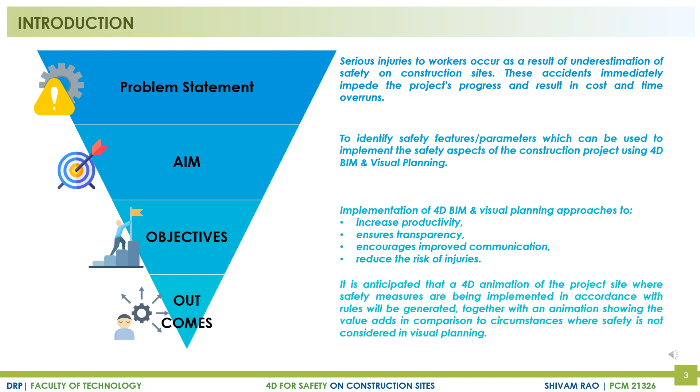The outcome here is targeted to be a 4D animation of the project site where all these safety measures are implemented, and a value-add comparison between the traditional construction project and the advanced construction project using 4D and visual planning principles can be compared. The next part will explain the literature review process.

Prior to the commencement of the research, the literature review has been done, and the introduction part says that BIM and health safety has been advancing with the development of newer construction practices, and 4D modeling has been playing a good role in the safety and health precautions in the pre-construction and design stage.

While there are still a lot of illnesses and injuries prone to construction workers and on construction sites, which are likely summarized by OSHA's categories like fall from heights, trench collapse, scaffold collapse, and repetitive motion injuries.

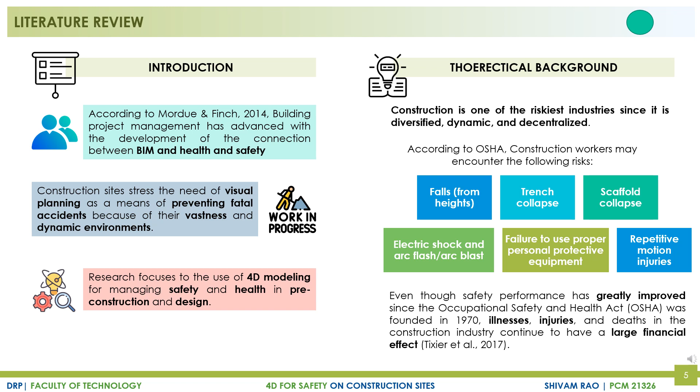Further, the literature review will focus upon the implementation of BIM towards the safety aspects. The research gap from the reviewed and studied literature is presented here.

There are a lot of BIM applications surrounding construction safety found, but there are hardly any instances that incorporate prevention measures modeling in the design process.

While there is certainly no parametric Revit family development in BIM kind of study found out, for instance a brief definition of parametric family is given.

On the right hand side we can see the literature review methodology that was figured out for this research paper, including the initial search, abstract filtration and final text, with results discussed in later slides.

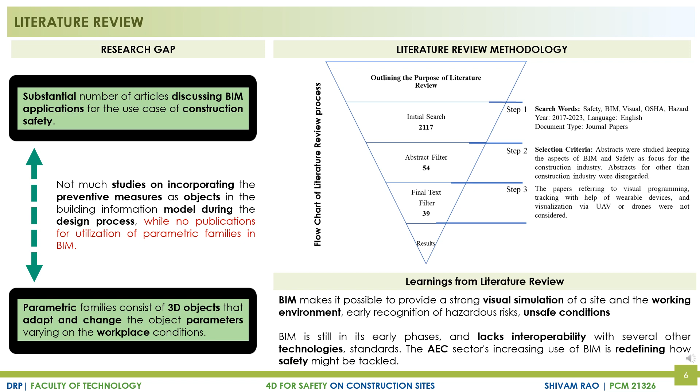This section will tell about the data collection processes. The primary data collection method is explained in this slide. Semi-structured interviews with subject matter experts were conducted.

Their opinions and reviews are given in the next slide, and their profile is given here. We can see the experts are of the HSE field, while another primary data collection was done with the help of conducting a questionnaire survey.

That is explained in detail in the report that is attached with this presentation.

The company profile has been attached of the construction firms to understand the scale of their company, while the semi-structured interviews have revealed that safety depends on project sites and is very varying according to the project and the conditions around the local sites.

Reference materials are widely available for Indian contexts, like guidelines, IS codes, and the Building and Other Construction Workers Act.

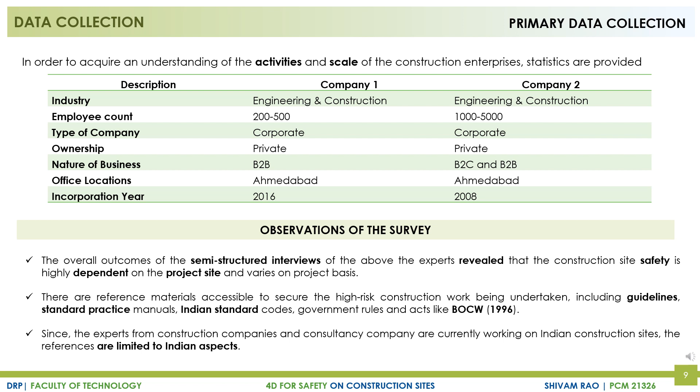While these construction sites are limited to Indian aspects, other national and worldwide aspects are covered in the secondary data collection. A lot of rules, regulations and guidelines are available throughout the world for the safety and health of construction workers and safer construction practices.

For the UK, the Health and Safety at Work Act is one of them. In India, the national building codes have their own guidelines. Similarly, here the list of other worldwide guidelines is present.

OSHA guidelines, the HSE guidelines in UK, the ILO guidelines and the ISO guidelines. These are all the sources of secondary data that will be referred to in the next slides.

The list of the standards reviewed by the author is given here. These standards are reviewed for the making of safety parameters in the 3D objects, which will be shown in the next slides. It includes the OSHA parameters.

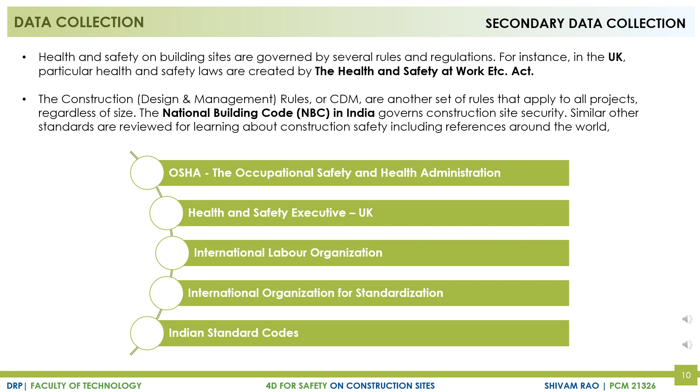There are certain books from Springer, Routledge, and several IS codes that have been referred to for the development of safety parametric Revit families.

Now we will go through the research methodology that is conducted and executed for the study of this work. This is the complete research methodology that has been followed for the study. This is a comprehensive flowchart that shows the tasks, the input, the process for that task, and the output that is derived at the end of the task.

Let's take the example of literature review. Here we have reviewed journal papers and have a definite search strategy, and we got the output of research gap, and we have developed a question based for the primary survey. Now second is the OSHA standards that we have reviewed, and similarly we can have the information regarding the safety clearances and what all objects are to be incorporated for equipments and the other objects on the sites.

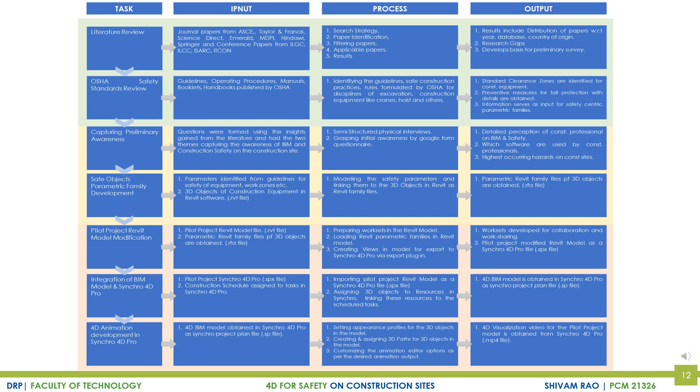This research methodology has several tasks like capturing preliminary awareness through a survey, then developing parametric family modeling, then assigning and loading this model families into the pilot project, then integrating this pilot project for the 4D visualization of the project in BIM model integration with Synchro, and then lastly we have the animation output development from Synchro 4D Pro.

The data analysis chapter will be discussed. Here we will be discussing the Revit parametric modeling, which will be the development of equipment families with parameters, and we will be looking through these families in this section.

Data analysis section. The findings from the study of safety standards is used to model the construction equipment and the safer zones around it. The barricades, the fall protection system, and the safe working zones are modeled, which will be shown in the next slides.

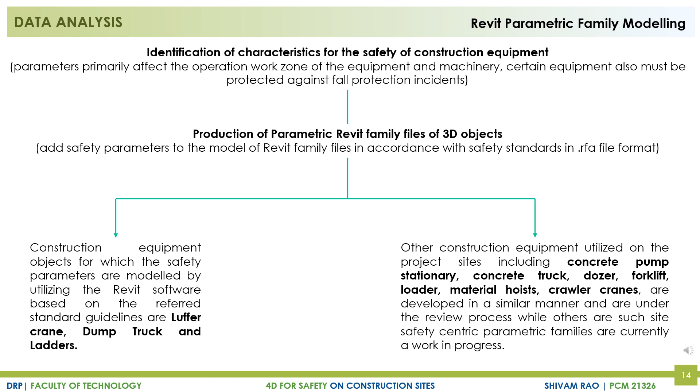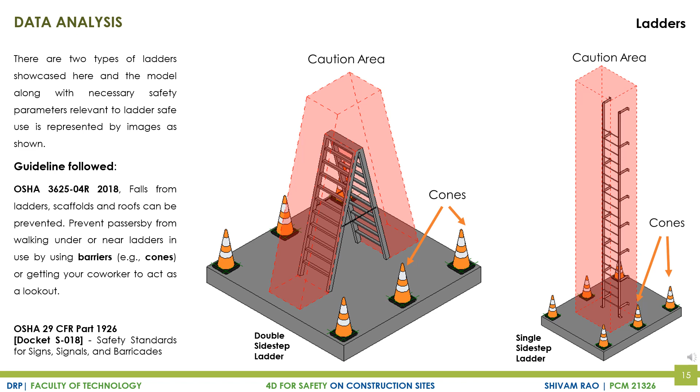These ladders are generally found out for the excavation pits where the worker movement or the inspection personnel can use these ladders. So it must be safe, and it must be also following other safety norms, like it should have 3-point contact with the surfaces. These ladders are also used for material movement or tools and tackles movements. So these are also used for building construction and used for above floor stories as well.

The other category of equipments and vehicles analyzed here include trailer trucks, dumpster vehicles, and these all are using IS Indian Standard Code guidelines, that is 7293, that was developed in 1974. It suggests that there should be at least a clearance of 0.6 meter between the trucks and the superstructure of the shovel or excavator or any other object that is being very nearby to the trailer or the oil tanker vehicle in this case. Here we have shown the other examples of the site equipments that will be discussed and will be following this same guideline.

So here the lack of guideline for individual equipment is observed, and here we can also identify that there was no any particular regulation floated or generated or drafted by OSHA. So we have used the Indian Standard Code.

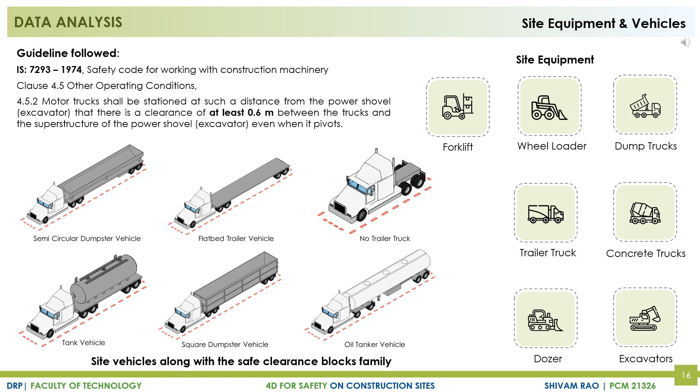Here we have shown the clearance zone by showing red clearance blocks that are created around the trailer vehicles, tank vehicles, and it is already seen that this is at least at a distance of 0.6 meter. As discussed in the previous slide, these are the construction equipment that will be following the same IS code guideline of having a clearance of 0.6 meter or 1 foot 11 inches, 19 by 32 fractions.

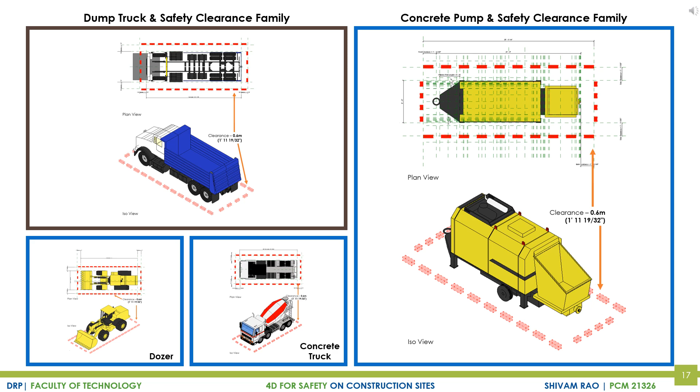So this will be a generalized guideline, as a specific or an individual guideline for the equipment is not available. So we have modeled following the IS code guideline. Here we can see the families of concrete pump truck, then concrete pump, then dump truck, and the dozer family is observed in this. Here we can see the clearance distance is kept as 0.6 meter, and it is denoted by the clearance blocks in the red. Here we have shown the top view or the plan view and the ISO view for the better understanding.

In this part of the data analysis, here we are discussing the concrete pump truck, that is the boom placer truck, or generally known as the boom placer. Here we have shown the safety guideline is not currently available with the OSHA's guideline. So the guide has suggested these norms and we have been modeling with the help of these norms.

So the minimum setup with the help of the safe distance from power lines is at least 20 feet away, and barricading and other means should be provided near the hopper area. So we have kept a clearance of 29 feet, which is almost greater than the equipment length, and we have kept barricading near the hopper area.

Here we have shown in the plan view and the ISO view. The red colored ring shows the clearance for the equipment.

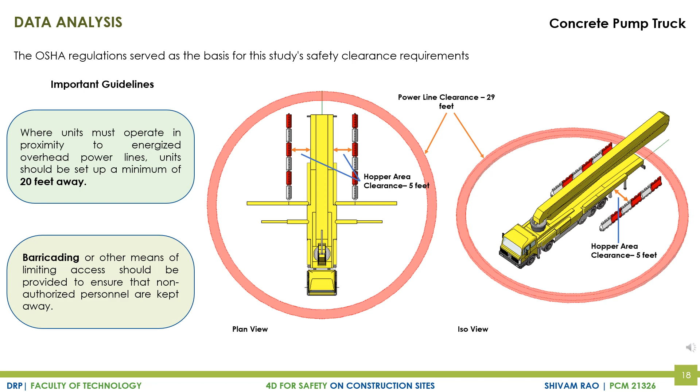For the excavator, here we have been following the Indian Standard Code guideline, that is 7293 through 1974. It suggests that the voltage in the power line and the minimum clearance distance should be as given in the table. For 11 kilovolt and below, it should be 1.4 meter.

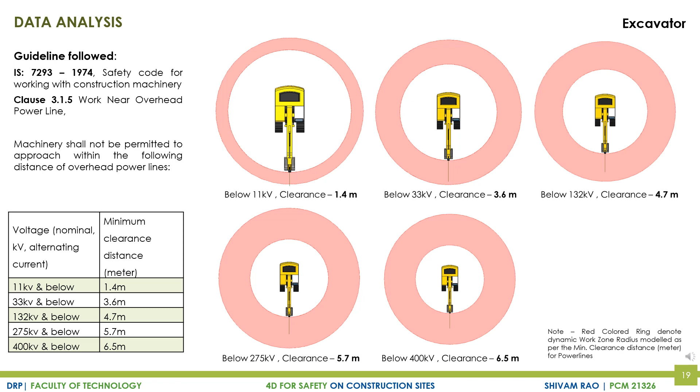So here we have shown the separate distinct cases of the excavator clearance distance based on the power line voltage. We can see 5 different cases, represented by the increase in the clearance distance as the voltage of the power line increases. The red colored ring shows the clearance distance from the equipment with respect to the surrounding power line, if there is any.

Here, the hoist family has been discussed. The hoist is generally used for transferring materials to upper stories of the building, and the personnel hoist is used for man movement to the upper stories from the lower parts of the building.

Here, there is an absence of guideline observed from OSHA. So the guide of this study has suggested using this guideline based on his experience and the nearby OSHA guidelines that have been studied.

So within 6 feet of any hoistway, there should be clearance available from the interior side, while for the exterior side, there should be a clearance of at least 10 feet from the exterior perimeter of the building. Based on this guideline, for both types of hoist, material as well as personnel, this kind of safety ring and blocks are modeled.

These are parametric. If we want to change the distances, we can just enter the parameters and change the 6 feet or 10 feet criteria as per the requirement of the site and the safety personnel present on the site.

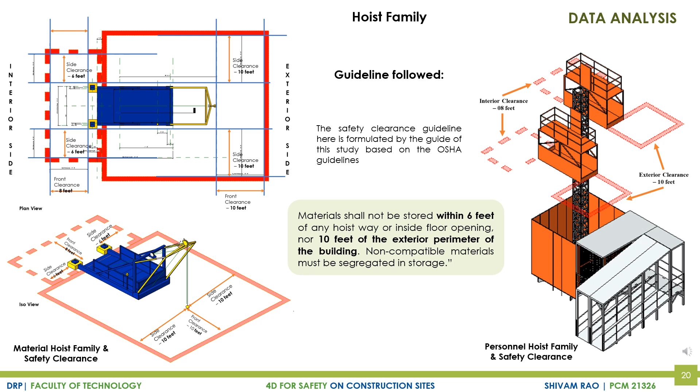In this part of the data analysis section, we will go through certain crane equipment families: crawler crane, crane that works for all terrain, luffer crane, and the tower crane. This is the modeling process flowchart for developing the safety clearance around the crane families.

First of all, we have to load the equipment in Revit. Then based on the reference planes, using the base arm length as a parameter, we draw another reference plane starting from the base arm length at a distance, giving that distance as a parameter of the clearance zone. Then in another Revit file, we create the same reference planes and make an extrusion object shaped like a ring, and import this ring extrusion into the parent file that has the site equipment vehicle family, then link both files and lock it.

Now with the help of this clearance zone parameter, we can increase or decrease the clearance zones based on the safety guidelines provided by OSHA or the respective guideline for the family that is in place.

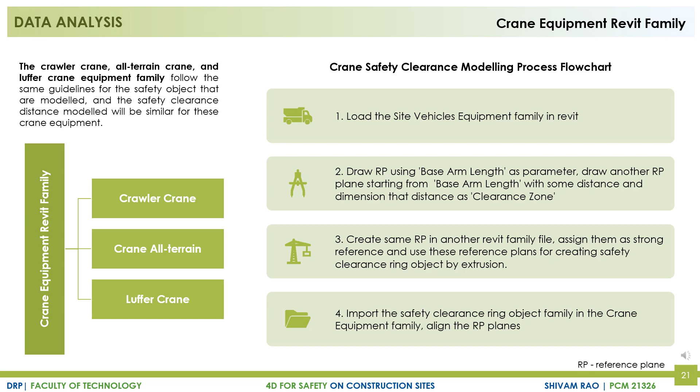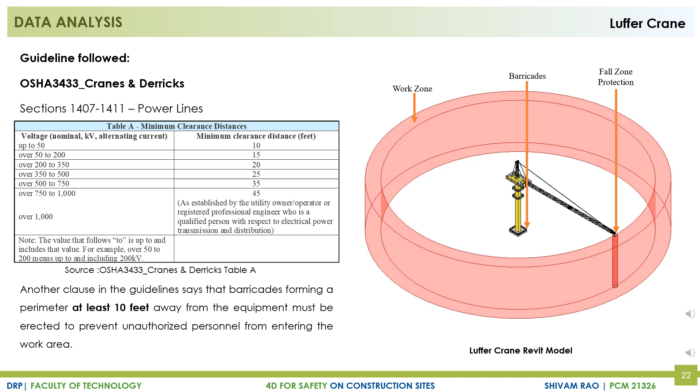This fall zone protection covers the area under the lifting zone, or that has any weight or object being lifted and has chances of falling from height or falling on a subject, or chances of hitting or striking an object or human or any other part of the site that is being constructed.

The luffer crane model family is created such that when we change the vertical angle of the arm, the total operating radius also decreases or increases depending upon the angle. At 0 degree the maximum radius is observed, and at 90 degree the minimum radius is observed. Similarly, the radius is linked with the work zone shown in the red color band, and it also changes accordingly.

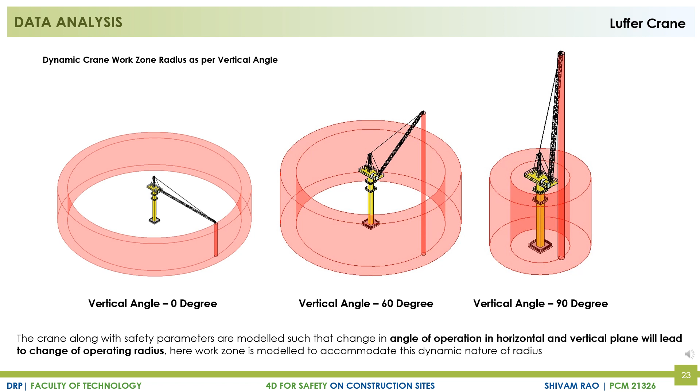One of the other parameters modeled is the safe distance or clearance from the power lines. Here we found the trend that as the voltage of the power line increases, the clearance distance also increases.

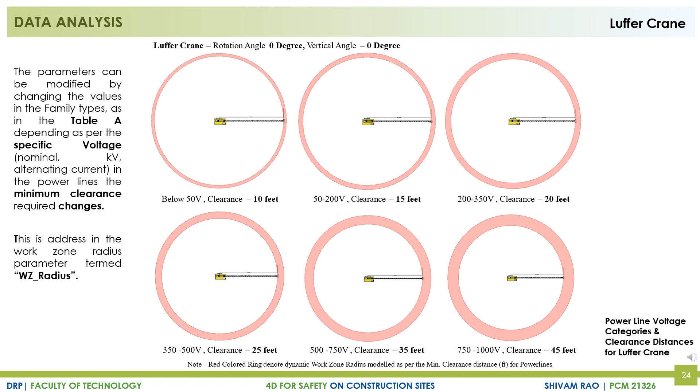For 50 volts or below, a 10 feet distance is observed, which increases up to 45 feet for voltages up to 750 to 1000 level in the power lines. So this work zone radius is also dynamically modeled to change with respect to the voltage in the power lines.

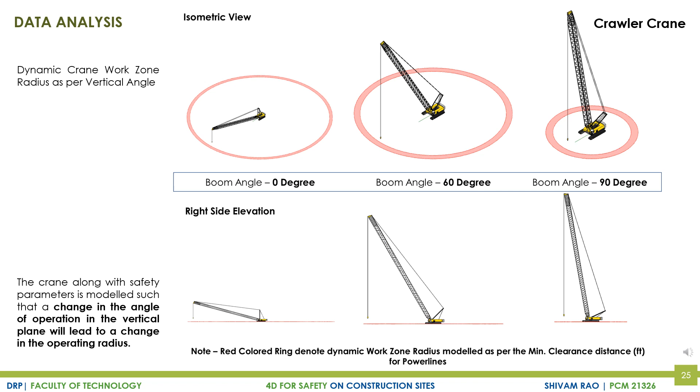Similar to the modeling of the equipment family of the Luffer crane, the crawler crane family has also been developed. Here, with the angle of change in the boom angle, we can find out that the angle of verticality will change, and this will also increase or decrease the clearance zone around the crawler crane equipment.

As observed in the Luffer crane, the voltage of the power line decides the clearance distance for the crane equipment. The same rule applies for the crawler crane as well. As the voltage increases, the clearance distance also increases. This has been represented with several instances of voltages and clearance distances, specially modeled for the crawler crane as well.

This distance is a parametric distance and can be assigned for different power lines by just a click of a mouse, and you can always set it based on the site requirements. Since it is a parametric family, you can always try to address the safety standards and play within the range of the clearance areas.

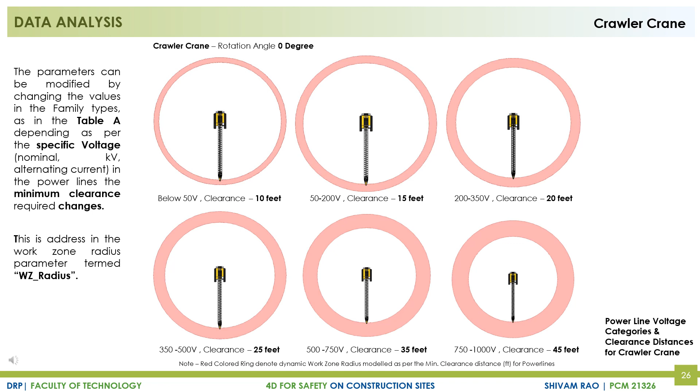The next model site object for the safety perspective is the safety net. These nets are always found to be effective in terms of fall protection where there are open edges or an opening that is uncovered, with high chances of falling debris, construction wastage, or other raw materials on workers, and also chances of being hit.

So these safety nets are modeled such that they follow the guideline of OSHA subpart, which suggests that the mesh size should not exceed 6 inches by 6 inches, so 36 square inches should be the area of the mesh opening. This mesh has been designed such that the basic minimum 6 inch by 6 inch requirement is always satisfied.

You can also change the operational angle when this mesh is attached to a surface edge. So in case you want to incline or decline it relative to the surface of the wall, you can always change the operational angle.

The length and width of the safety net are parametric and customizable, so you can increase or decrease the length or width depending upon the construction site equipment.

The safety net follows the guideline of a minimum 8 feet projection from the edge of the work where it is happening, and this safety net is modeled so that you can increase it from 8 feet to 13 feet, or even 25 feet, depending on site conditions. The net has provision for increasing or decreasing the length and width.

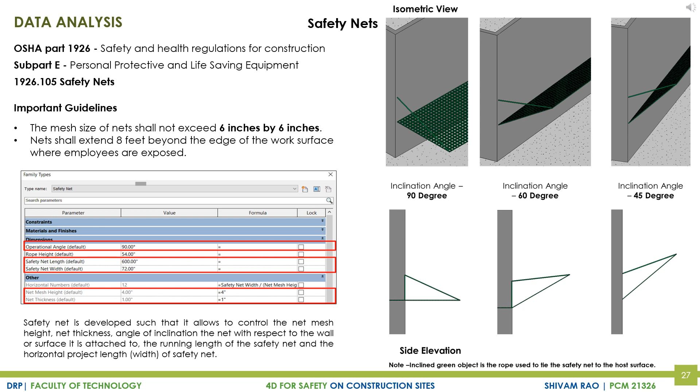The next object pertaining to construction site safety that has been modeled is the fire extinguisher. This follows subpart F for fire protection and prevention of OSHA part 1926. The important guidelines are that no area should exceed 3000 square feet without the protection of fire extinguishers, the distance should not exceed 100 feet, and there should be a fire extinguisher on each floor.

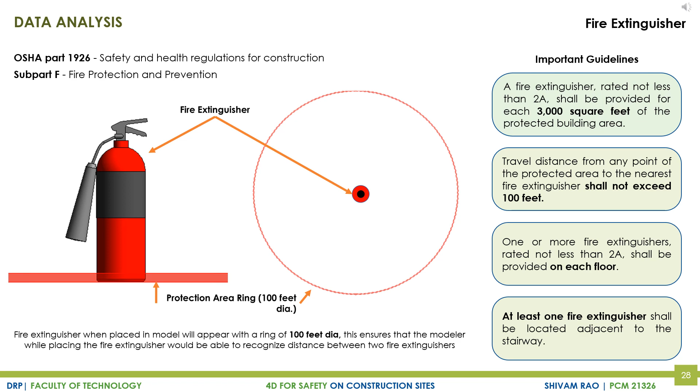To address these guidelines, we have modeled a protection area ring with a diameter of 100 feet. So when you place the extinguisher model family in a pilot project or a 3D project, you can observe the distance between two extinguishers and figure out if it is more or less than 100 feet. This helps with better modeling, visualization, and placement of fire extinguishers.

Overall, we can briefly say these are the benefits of Revit parametric families. They provide design accuracy and dependable design of building components like barriers and other safety-critical parts. Early safety issues can be detected, and various design possibilities can be made with the help of these parametric families.

Standardization has been a key point achieved with the help of these parametric families, because you can always circulate these parameters within your building model and organization to avoid irregularities from individually loaded families. This can be a standard common point of reference, while optimized documentation can be carried out with the help of these families—we can always extract information like numbers, measurements, and instances of the objects placed in Revit.

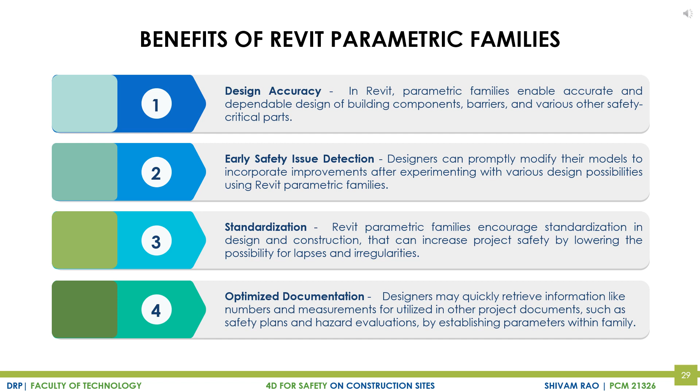Output can be already generated based on the equipment that you have loaded in the model, and an optimized output document can be prepared of the families that are in the model.

Now moving to the 4D visualization part. This involves incorporating the schedule or time dimension to the 3D model. The inputs required for developing a 4D visualization or animation are the Revit 3D model, construction schedule, and Synchro 4D Pro, which helps develop this visualization in terms of appearance and other properties that we will be discussing later.

The process for developing this visualization is: first we have to modify the pilot project we received based on the outputs we require. We have to set certain views and create certain worksets, which we'll discuss next. Then the integration of this BIM model from Revit with Synchro 4D Pro is done, and 4D animation and other settings are enhanced and customized in Synchro for generating this animation.

There are several benefits of integrating this 3D model with the time schedule and developing 4D visualization. Talking specifically about Revit parametric families, they promote accurate design, early detection of issues, improved coordination, and visual representation of the complete construction process, which also helps in terms of construction safety aspects.

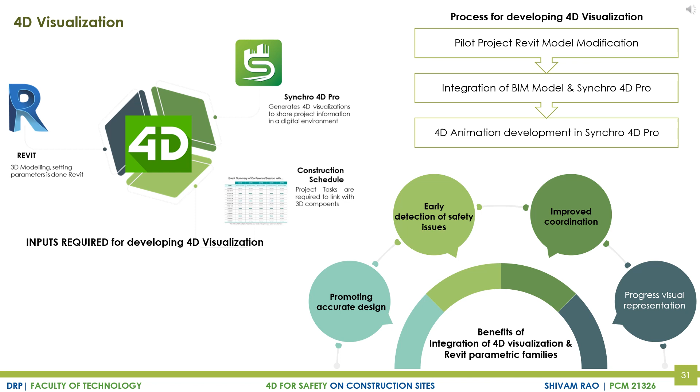The 4D visualization part is now explained in terms of the Revit model modifications we have to do. Here the pilot project brief is given: it is a mixed use project with 3 pours in each tower, 2 towers A and B, with a lobby area in between, and each tower is 11 stories high. The pile foundation is the type of structure system supporting this 11-story pilot project.

So here we have taken this Revit model for developing the 4D visualization and to test our Revit families of equipment and other objects we have created, to check how these safety centric parametric families are helpful for enhancing visualization in the construction safety domain.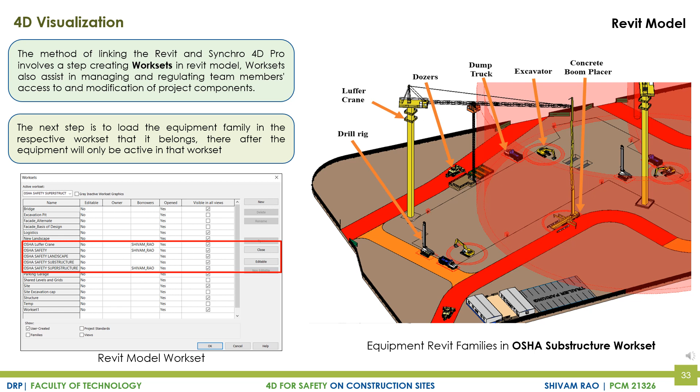Similarly, the other worksets including OSHA superstructure workset and the landscape workset are shown here. Both worksets have different equipment, like dump trucks and dozers for the landscape workset, included in the road works, while the structural workset has concrete elements and equipment like the concrete truck and pump. The superstructure workset also has fire extinguishers placed once the superstructure work of that particular floor has already been completed.

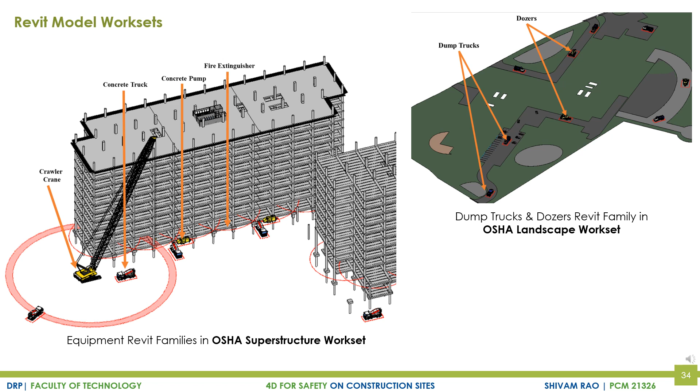Here we can see the red zones showing clearance areas, with red rings and red safety clearance blocks visible in the superstructure workset. These clearance blocks are parametric and modeled in such a manner that we can increase or decrease them based on project requirements, but they should always adhere to the OSHA safety standards they were particularly modeled for.

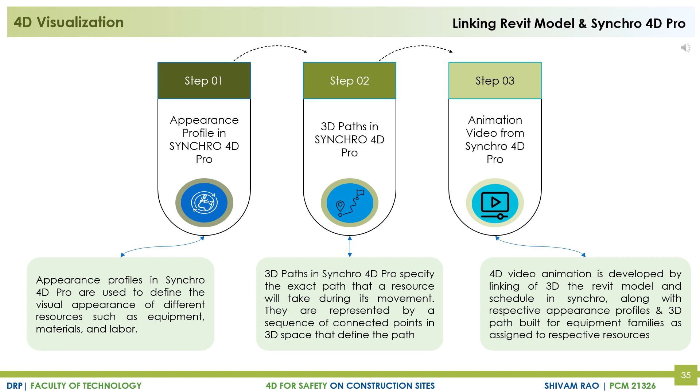The third step is developing an animation video from the Synchro profile, combining the appearance profile and the 3D path. For example, an excavator assigned foundation work and excavation will have an appearance profile in the direction of the foundation work, going from the excavation pit till the end of excavation, with a 3D path assigned from start to end. This movement is followed by the equipment and can be viewed in the animation video developed from the 4D Synchro Pro output.

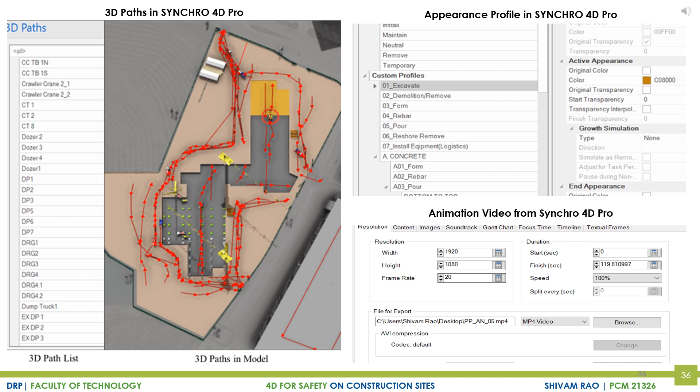The last screenshot shows the animation video settings, where you can adjust based on the requirement of the output, such as resolution, content, and soundtrack for better aesthetic and pleasing visualization. You can also add text frames, for example sample project 1 or other important notes, in the animated output. This is the step by which the animation video output from Synchro 4D can be exported.

Now we will see certain snapshots of the Synchro 4D visualization, representing project stages where the output video has been paused and a screenshot taken. The video itself has not been added in this presentation due to heavy file size and a restriction from the guide. Instead, we have added several screenshots representing the whole video at different key phases of the project.

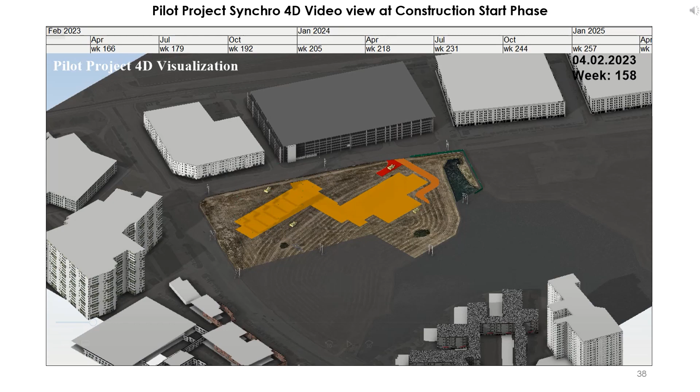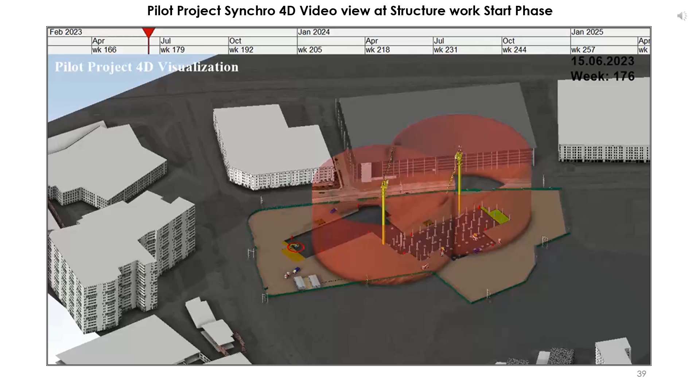Here we can see the piles have been erected and the columns for the ground floor have been cast. The next screenshot will show a different stage of the project.

So for careful operations, these kinds of modeled safety zones are always helpful for identifying clashes between the electrical lines, and we will see this in a comparative manner in the next slide.

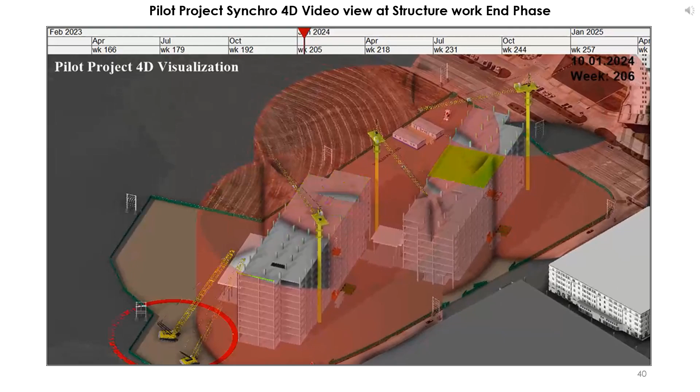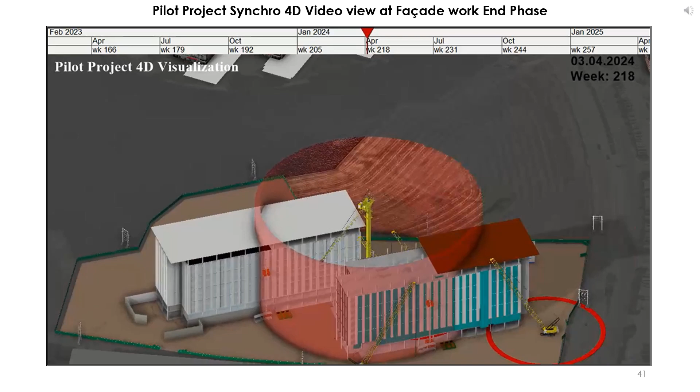Here we can see a screenshot captured at the end of the facade work phase. Tower A facade work is the last activity going on, and the other tower cranes have been dismantled while the crawler crane working with this facade is still employed. The other landscape and hardscape work will now begin because the ground has been cleared and the vegetation removed, making it ready for the next works to begin.

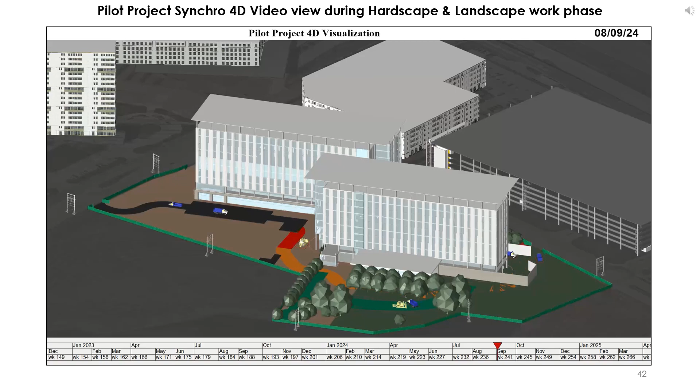Here we can see the final image at the construction end phase with all the hardscape and landscape work done. All the towers with facade works, concreting, and complete structural work have been completed.

Here we can see how the complete project looks at the end with the help of the Synchro output. We can observe the final output, the time duration of construction, and how there is a better possible manner to construct the building with the help of the safety parametric families we have loaded, developed using the professional capabilities of BIM and Synchro 4D Pro software.

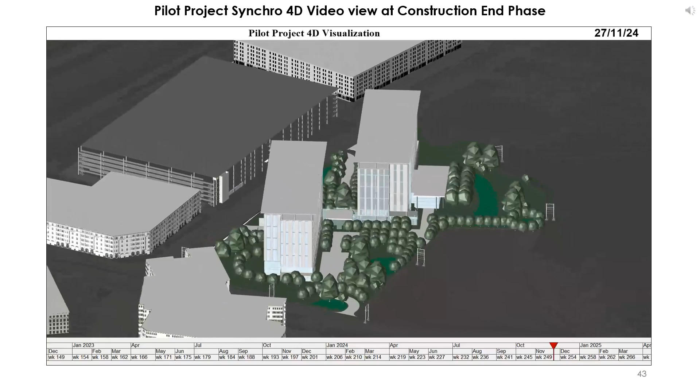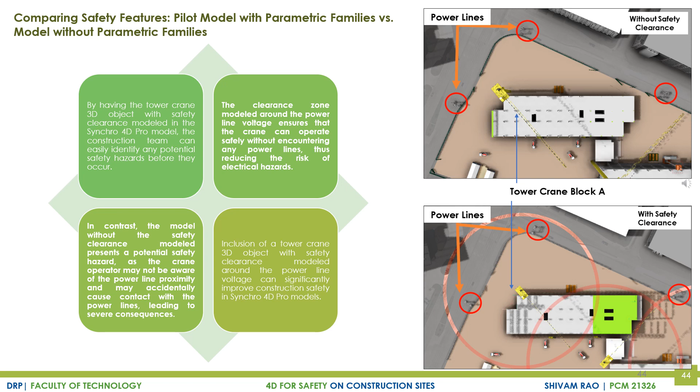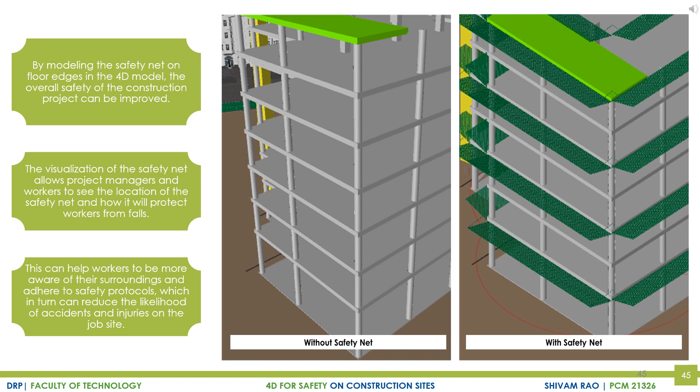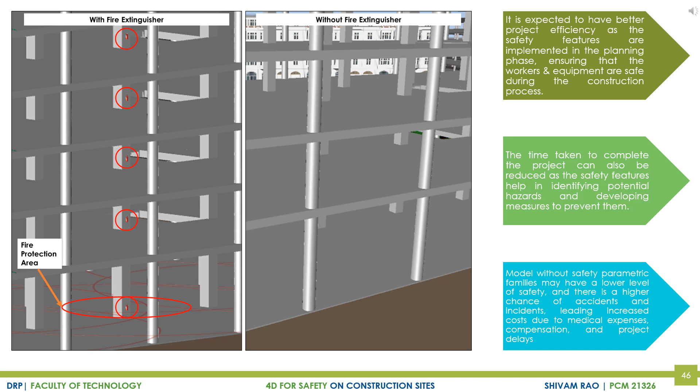As discussed about the fire extinguisher family we developed, the model has fire extinguishers placed at all stories, while the other model with the same project and location does not. This shows how there are higher chances of accidents and incidents leading to medical expenditure and high compensation, whereas with fire extinguishers provided we can identify the protected area and restrict fire near its source, identify potential hazards, and enforce measures from the beginning through early safety issue detection enabled by these Revit parametric families.

We will now be moving on to the summary and conclusion part of this research study.

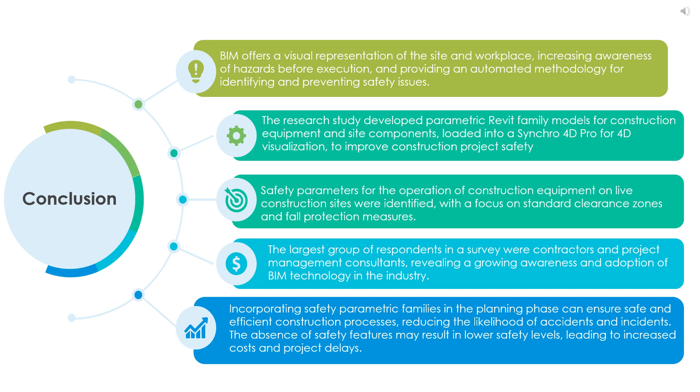The chances of accidents or hazardous unsafe practices can be reduced to a certain amount, which is very helpful for the progress of the construction industry because it lowers the chances of construction accidents on the project, which in turn helps reduce the number of delays the construction project faces.

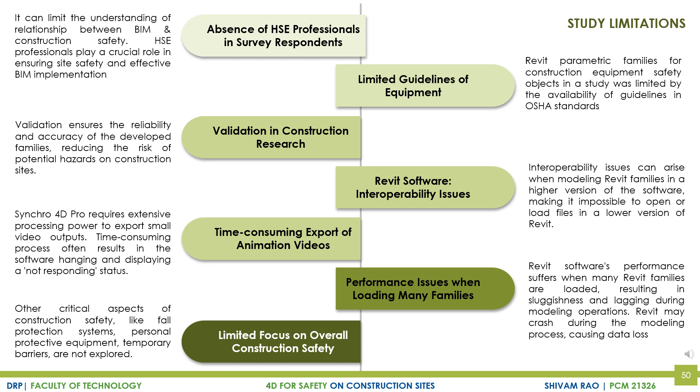The focus here is mostly on the construction equipment part in this study, and there are certain objects, but there should be a focus on overall construction safety in terms of occupational hazards and all the 'fatal four' kinds of hazards that OSHA has suggested. So this is one of the limitations of the study as well.

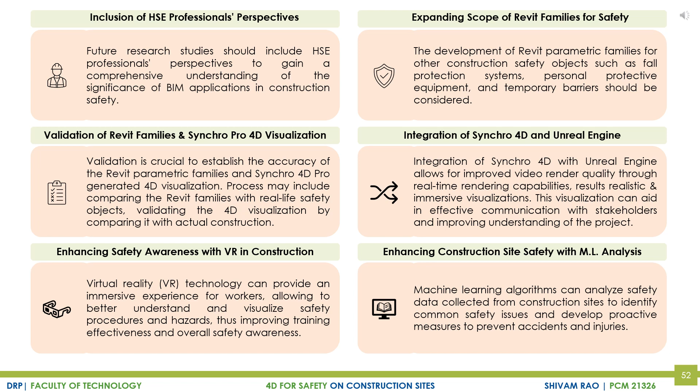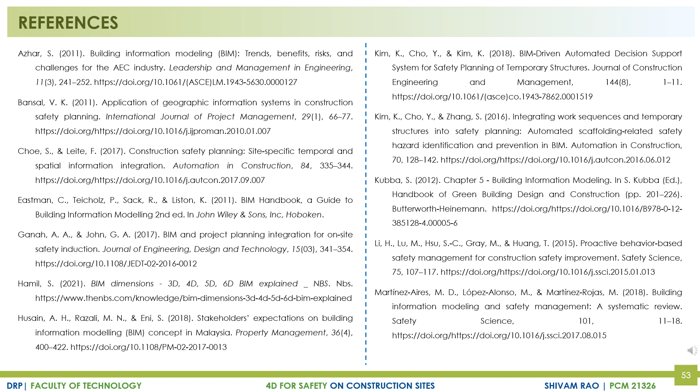Here we have shown the list of references for the articles and sources from where these articles have been referred. This is the secondary references that we have presented here.